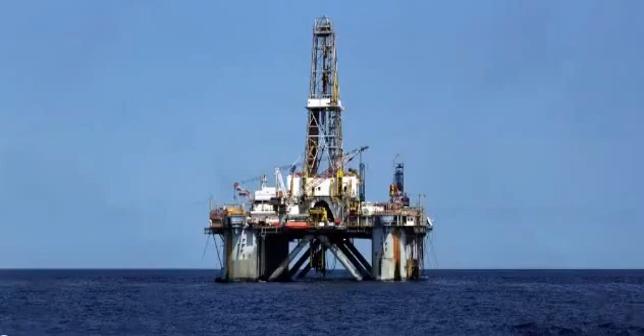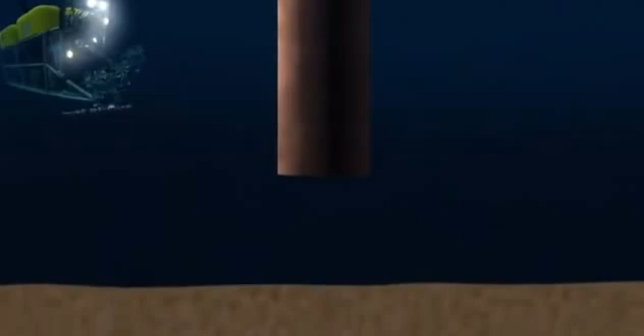Offshore drilling rigs have all the functions of onshore rigs, but also need to stay on station in a variety of sea states and allow for secure connections between the surface and the sea floor. To start an offshore well, a thick-walled, large-diameter hollow tube called a conductor is embedded in the sea floor, with the aid of a bit that jets away the sediment with high-pressure seawater.

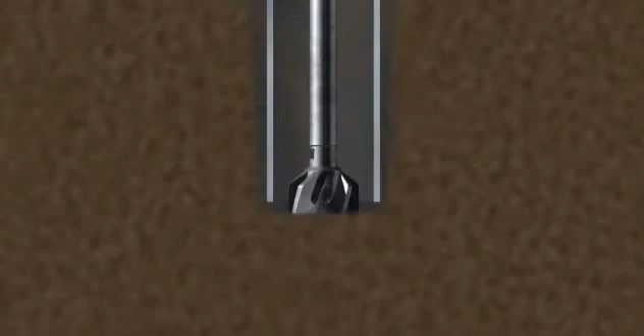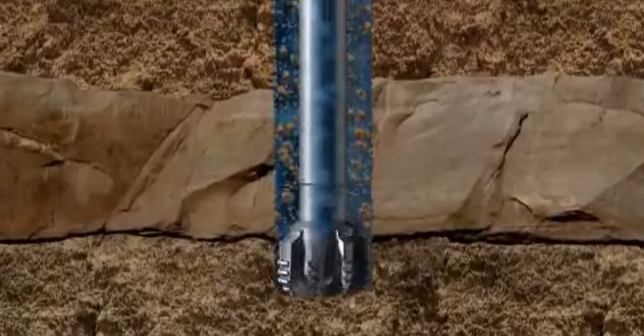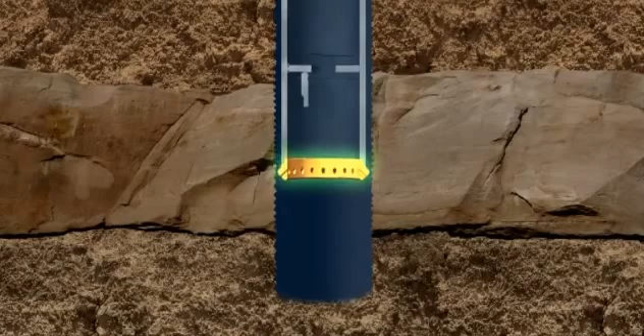When the conductor has penetrated about 250 feet, the jet bit is retrieved and a drill bit introduced. The cuttings are just washed to the top of the well by seawater pumped through the bit. A second run of conductor is now lowered into the hole. At the bottom of the conductor is a guide shoe that stops the conductor snagging on the well bore. Above the shoe is a flap valve called a float collar.

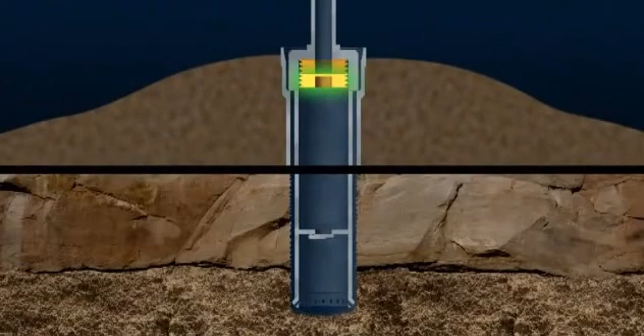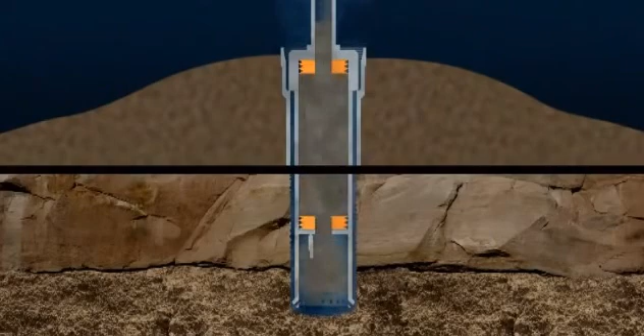A cementing tool is connected to the top of the conductor. A plug that pushes the seawater out is driven downwards by high-pressure cement that fills the conductor. On reaching the float collar, this plug is ruptured, and cement flows out of the bottom of the conductor and up the annular space between the wellbore and the conductor.

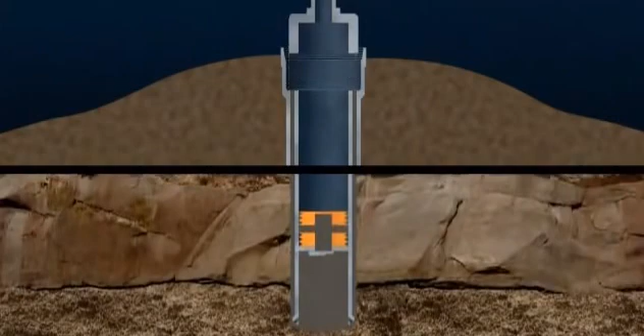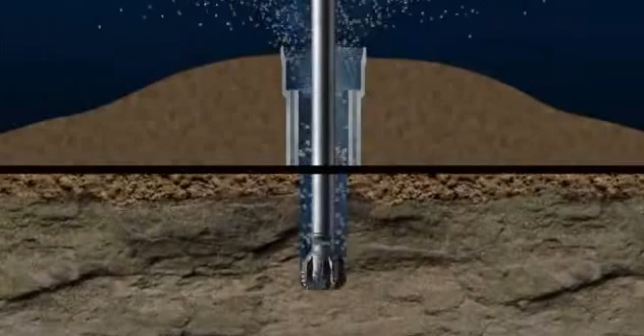The cement plug tool is removed, and when the cement has set, drilling continues with a smaller diameter bit, penetrating the cement plugs and float collar and into fresh rock. After a suitable depth has been drilled, the drill string is removed. Then steel tubing, known as casing, is lowered into the hole and cemented in place. This first casing run has an attached wellhead.

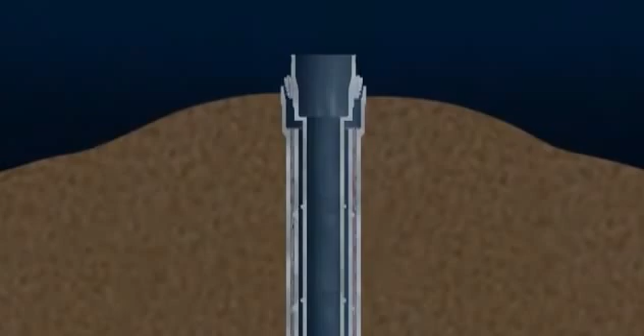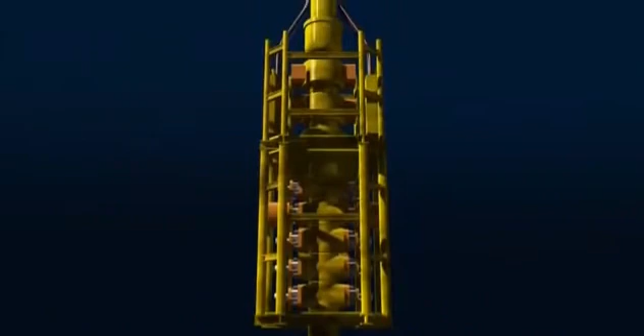A blowout preventer, BOP, a robust set of valves that can shut in the well even if the drill string is down the hole, is then lowered and locked onto the wellhead. The BOP is connected to the sea surface by large diameter tubing known as a riser, which allows drilling fluids to be returned to the surface. From this point onwards, the drilling procedures are similar to those used to drill an onshore well.

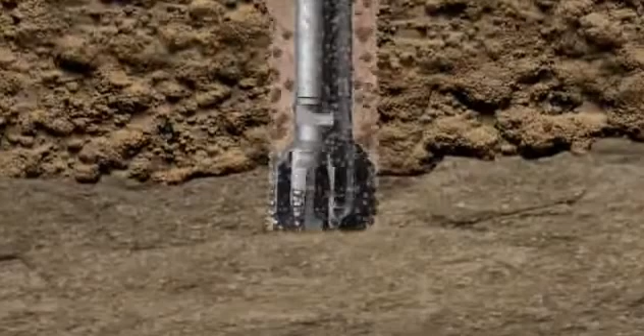With the riser in place, seawater is replaced by a special fluid known as drilling mud that is pumped down the string and exits through ports in the bit. The mud not only cools the bit, but also clears the cuttings from the hole. The cuttings are captured at surface and examined by geologists to characterize the rock types that are being penetrated.

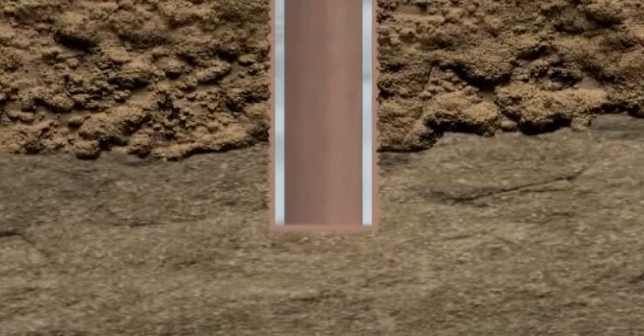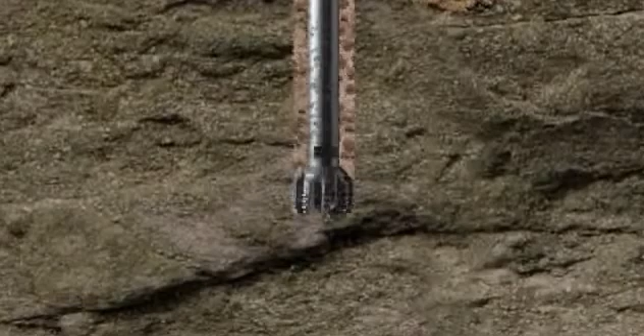As drilling continues, sets of decreasing diameter bits and casing strings are used as the well penetrates deeper into the rock. Each run of casing is cemented in place to provide integrity, a sealed system from top to bottom. The density of the mud is controlled by the mud engineer, adding dense minerals when needed. The aim is to produce a column of dense mud which exerts sufficient pressure in the well to counteract pressure from fluids encountered in the rock. This combination of the dense mud column contained in properly cemented casing aims to control pressures in the well. The BOP provides a further level of security.

When the well penetrates a potential reservoir rock, the oil or gas may be detected by analyzing the drilling cuttings for traces of gas and/or oil. At this stage, it is essential to gather as much information as possible about the reservoir. Two methods provide most of the information. In the first, the drill bit is replaced with a diamond-studded coring bit at the bottom of a core barrel. This can cut a complete section of the reservoir rock and return it to surface for detailed analysis.

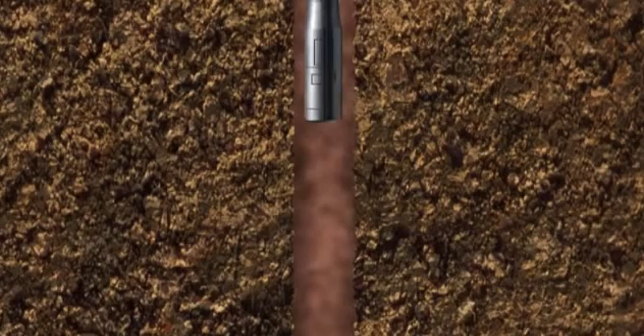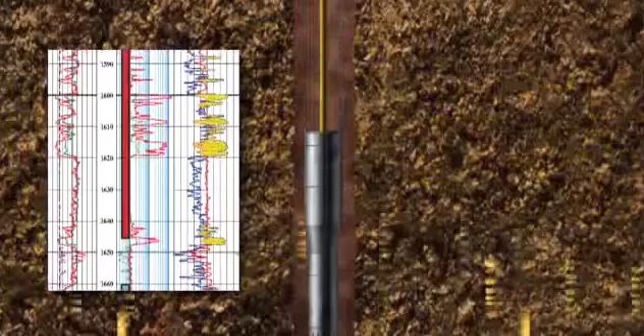In the second, coring may be replaced or complemented by running a suite of geophysical logging tools, which are run on electric wireline. These are instruments that can measure the physical properties of the rocks as they pass slowly through the wellbore.

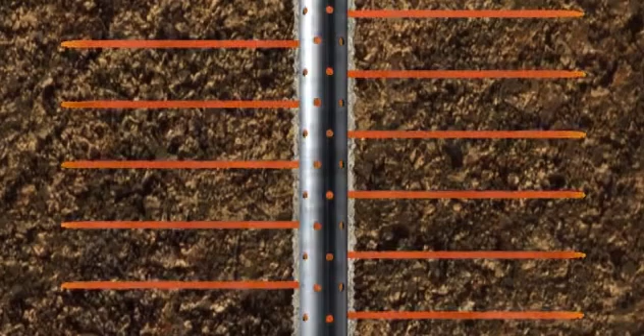When as much information as possible has been gathered from the reservoir, a decision is made on whether to complete the well for production, suspend efforts with the option to return to the well at a later date as more information on the reservoir becomes available, or to plug and abandon the well. If the well is seen to have production potential, the reservoir interval is lined with casing. The casing is then perforated to allow reservoir fluids to enter the well and travel up the installed completion production string to surface.